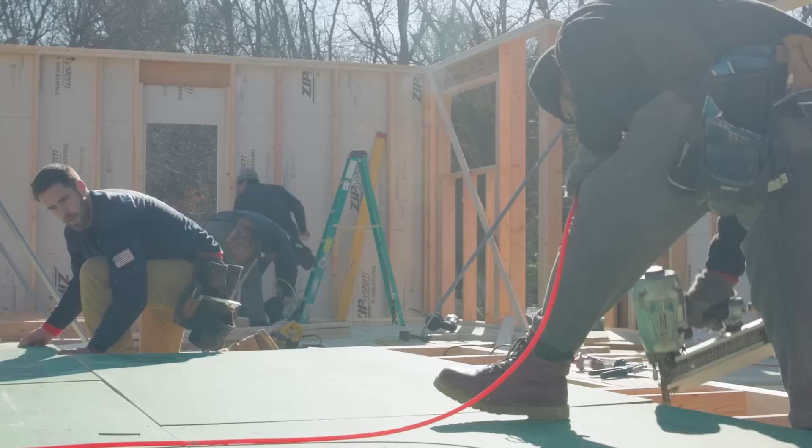Hey, Build Show Build Boston. Steve Baczek, Architect here. You guessed it, it's wall framing day. Nothing more exciting than seeing this thing come alive in 3D. No intro today, let's get after it.

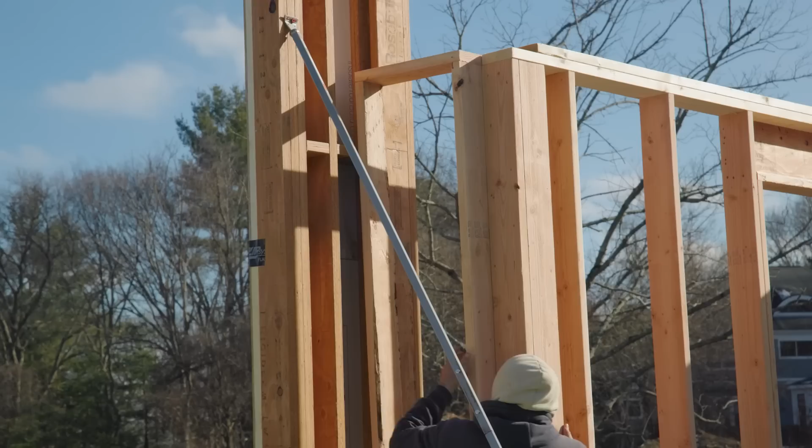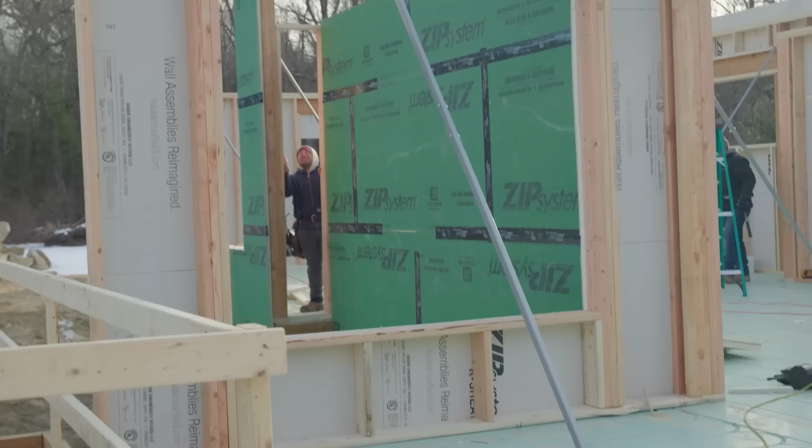So we're talking about wall framing today. There's a lot of exciting stuff going on, framing walls and standing them up around us, but it's really important before we get to the action that we understand what pieces we're using, what their names are, and some of the building science behind a wall assembly. We'll run through all of that, then get into the actual framing and putting some walls together. First, let's talk about what we're using.

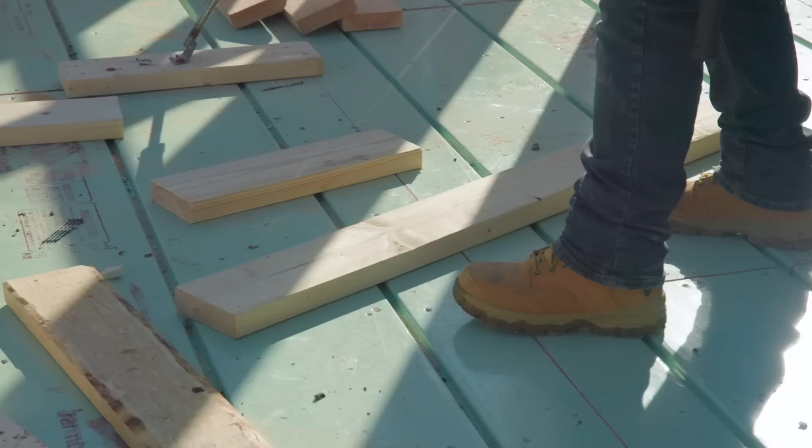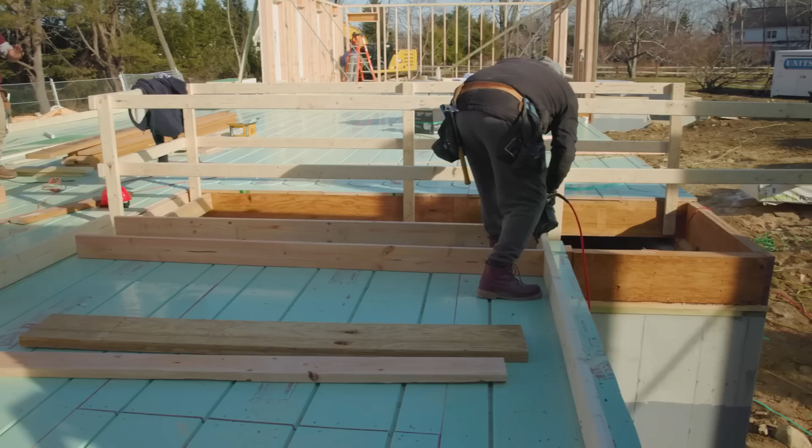With exterior walls, the common material is a 2x stud. Historically we started with 2x4s, then moved up to 2x6s in our climate zone, and it's somewhat dependent on climate zone. The insulation rating and building science rating of your wall system is tied directly to the climate zone you're putting it in. For example, in Florida, South Carolina, or Georgia, we might not have to build as insulating a wall as we would here, or say in Minnesota or Montana, for obvious reasons. So here, typically we build with 2x6.

The spacing, just like floor joists when we talked about floor framing, you have the option to do 16 or 24. 19.2 is probably an option too, but I can't say I've ever seen one framed. So basically 16 or 24 inches are your options. Here we're doing them 24 inches on center.

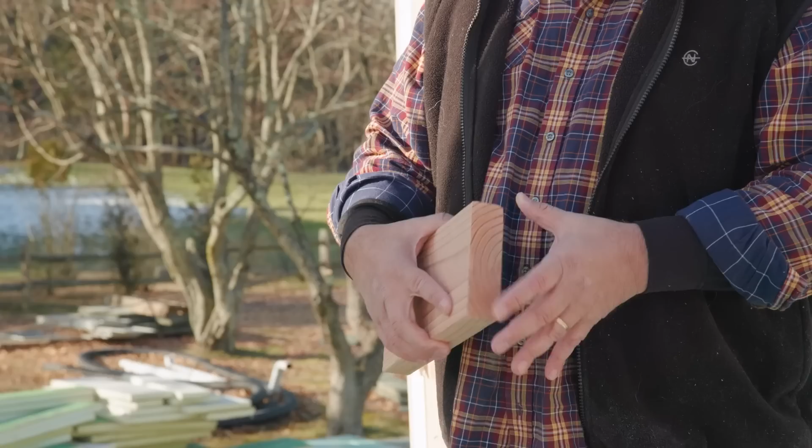We're using two different kinds of studs. The most common is just a solid stick, we call it a 2x6. The actual dimensions are 1.5 inches by 5.5 inches. The 2x6 name comes from before it gets dressed and cleaned up, it's basically the rough cut piece of wood. So 1.5 by 5.5 inches, and they come in all the standard lengths, you can get 8 footers, 10 footers, 12 footers, 14 footers.

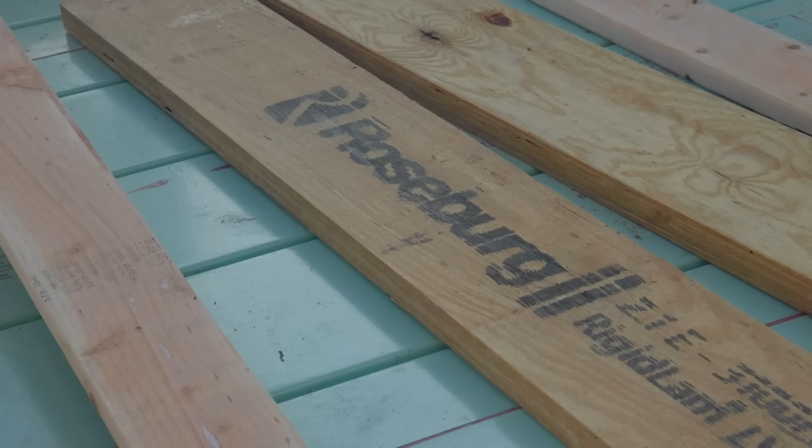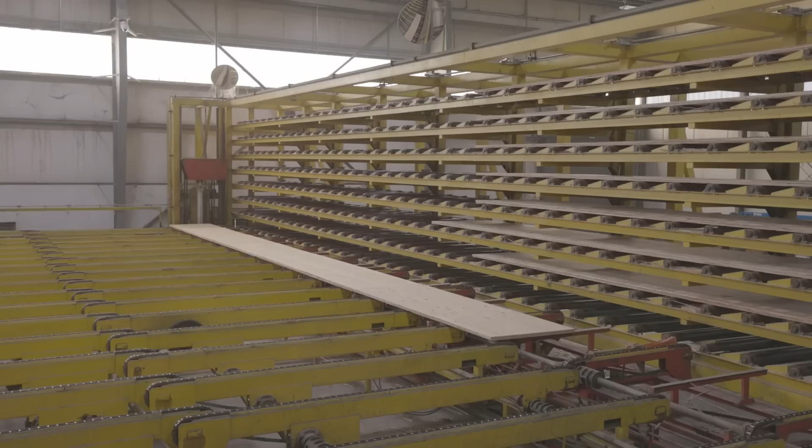But here we have a number of tall walls, so we're actually moving to an LVL stud. You can see this is made up just like plywood. When I was out at the factory, these things get made up in 4 foot wide by 66 foot lengths, it's absolutely incredible, the tour I got at the factory. After they get made up as these giant LVL slabs, they simply get cut to 5.5 inches, so they're very much the exact same dimension.

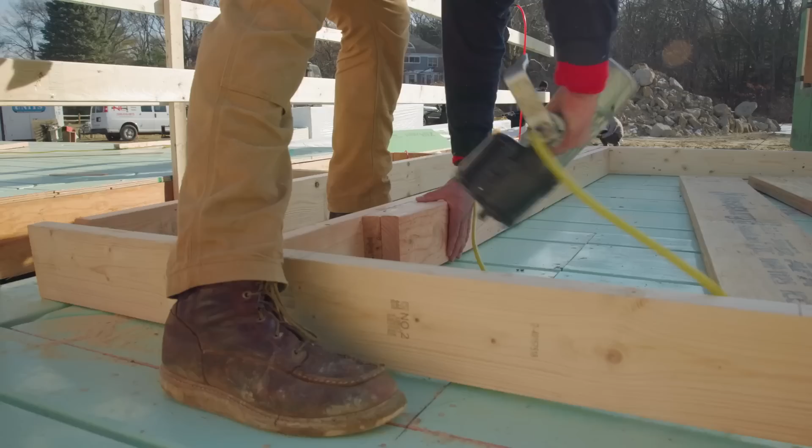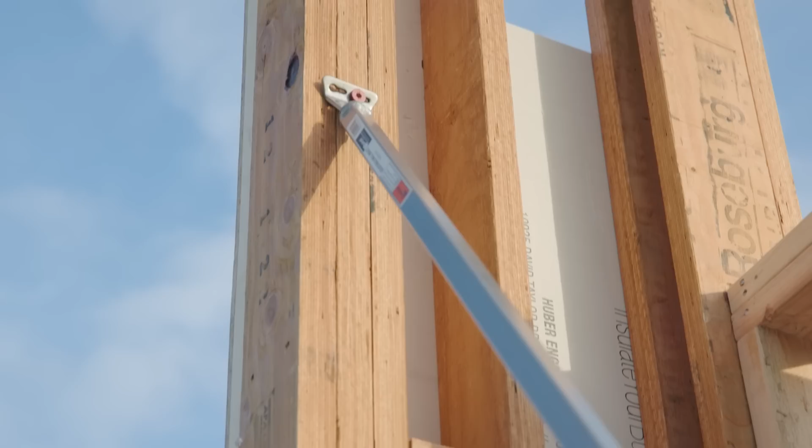The nice thing about this is you get a nice crisp edge, so the perception is that it's really clean framing as opposed to the little rounded edge on the regular stud. But the reality is these are a lot stronger and more stable. We have a number of places with tall walls where we're using these for strength, but also because when you get to walls that are 14 or 15 feet tall, you're at risk of twisting and warping. So to avoid that, we go to the engineered stud, it just makes for a stronger, more stable wall.

In other areas where we need columns, we're using LVL, or basically engineered wood columns. These are nothing more than the stud, but in 3.5 inch thickness, 5.5 inch. These take the place of steel columns, lolly columns, built up stud work. Historically we would do 3 or 4 2x6 studs ganged together, but in lieu of that we use a lot of engineered wood products. One, we know exactly what load these can take, and they're dimensionally cut so they fit right inside our wall system and are able to pick up beams along the way.

As far as the header goes, it's nothing more than a beam that goes over the window. We have our wall, and we want to cut a window in there, so we have to introduce some kind of support above the window, and that's where the LVL gets called into duty. The LVL is again just basically a sheet of plywood, it's 1 3/4 inches thick, and in this case they're 9.5 inches deep. We'll talk about those a little later.

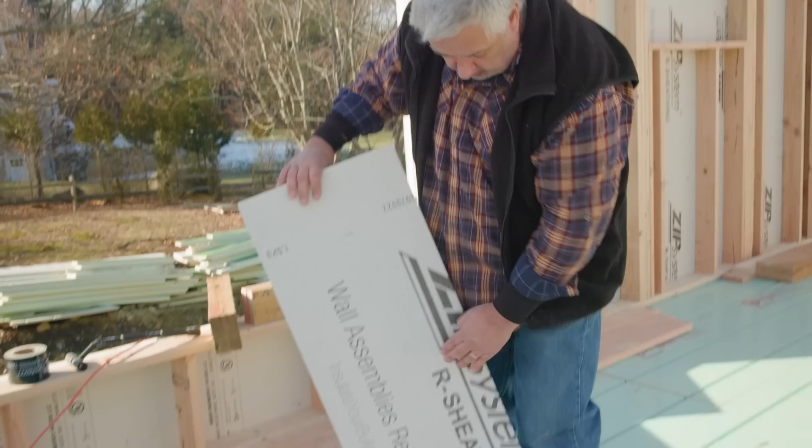In terms of the wall sheathing, we're using a Huber Engineered Woods Zip R sheathing. You can see it says Zip R system, R sheathing on the outside. What they mean by that is the standard zip is a 7/16 inch OSB, oriented strand board, made out of a series of strands intentionally laid in a specific orientation at the factory so that they can develop a strong sheathing panel in the 7/16.

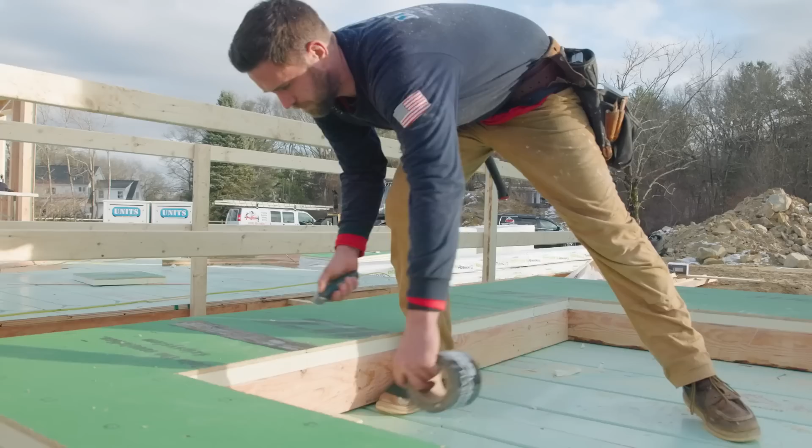You can also see on the outside it has this green stuff, the green color. As you drive around, you see a lot of green buildings going up. Zip is pretty much the go-to sheathing for most residential projects done across the country. But this one has a little bit of a twist.

Because we're climate tuning it to our climate zone 5 here, we've actually added 1.5 inches of polyisocyanurate. They make the zip, send it out, and then this piece of polyiso gets adhered to it. The 1.5 inches there provides an additional R9. So in this one sheathing, I get the weather-resistant barrier because it's integrated into the panel.

I get the structural rigidity of the shear panel, and I get the insulating value of a Zip R9, all in the same material. Now, even as a Zip R9, there is a shear resistance to this panel. If I put the panel on top of the wall framing without the insulation, the shear values are going to be a little bit higher because the nail is placed in what's called single shear, meaning the panel is directly attached to the wall framing. Because of the displacement of the 1.5 inches, it puts the nail in what's called double shear, which makes the shear path work a little less in our favor. So you get a slight reduction when you use this, but it's still strong enough to meet all of the codes. Again, this whole house has been fully engineered and reviewed by our structural engineer.

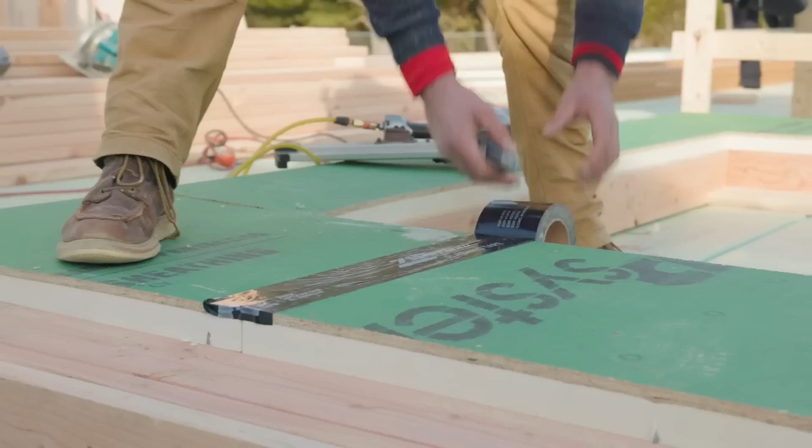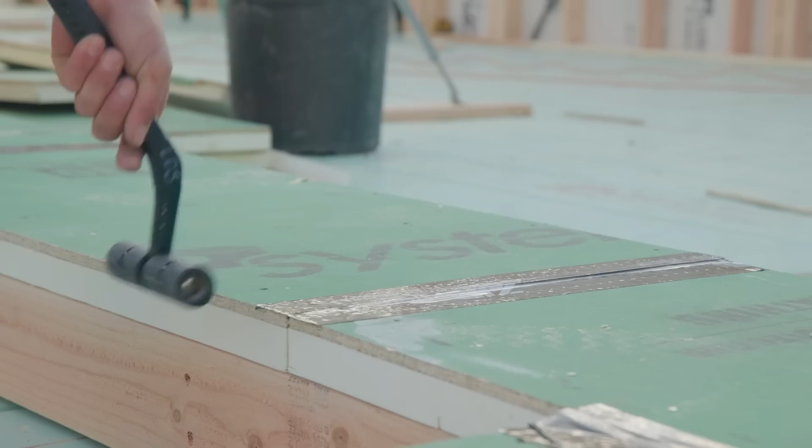They actually provide a tape that gets applied to all of the joints, their standard flashing tape. It's 3.5 inches wide. It gets placed on there, and they actually provide the Zip system roller, which has little Z's in it. As you roll it, it embosses these little Z's onto the tape, so you get a really quick quality control just by visually inspecting it.

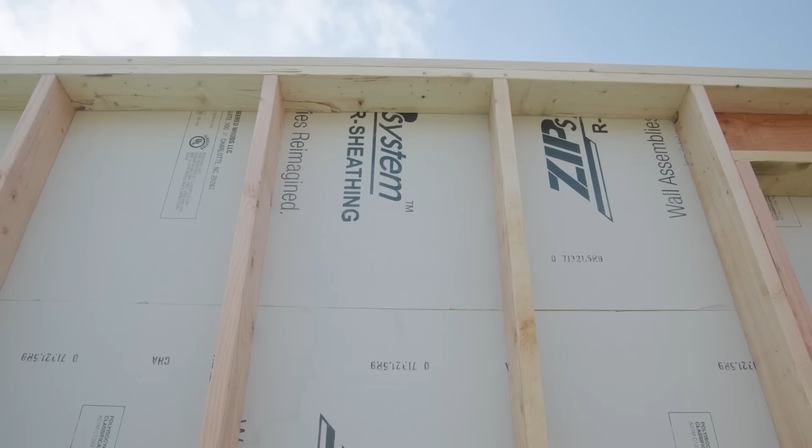So the beauty of that, as they claim, is the Zip R sheathing is not just an R sheathing, it is a system. Again, we get that weather-resistant barrier, we get the insulator, we get the shear panel, but the minute I attach that tape, we have a very effective air barrier. I know this because I've done a number of houses where we framed them, didn't cut the holes for the windows, and just tested the Zip R sheathing. We'd get numbers down in like a 0.3 ACH50, air changes per hour at 50 pascals. So it's an extremely effective air barrier if installed properly, with the tape installed and rolled and all of that good stuff.

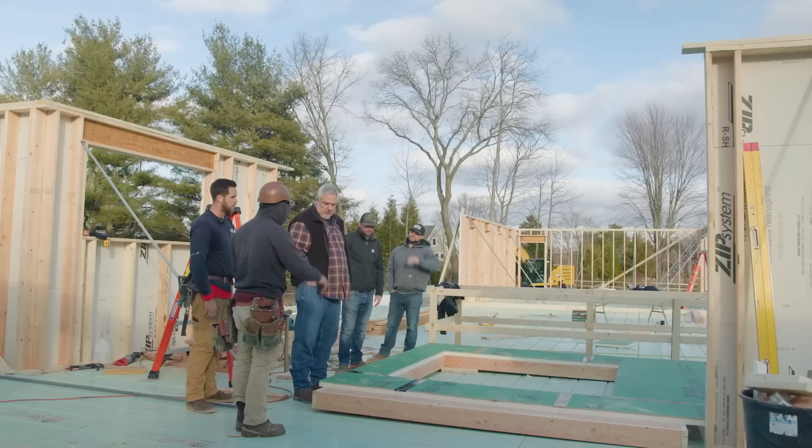So anyways, we're going to move down the wall here. Let's talk about some of the components that make up a wall frame.

We'll move down the wall here and talk about some of the names or the nomenclature in a wall framing system. We talked about it a little earlier, I mentioned the word stud. You can see we have our common studs here, which make up basically the main body of the wall where we don't have windows -- that's the main structure of the wall. Again, we have the options of framing 16 or 24 inches on center usually. Here, I chose to go 24 inches on center. It makes for a little bit more energy efficiency. Some people term it advanced framing or value engineered framing. I just call it, keep it simple, 24 inches on center framing.

So, common stud. When you have a window opening, which this represents here, this will all get cut out of the sheathing in the future. You have basically the rough sill, which you see here, basically the stud placed horizontally, so that frames the opening on the bottom. What supports the rough sill are called cripples. The cripples are nothing more than common studs that got cut to support the sill at whatever that given dimension is.

On the sides of the windows, you'll see we have our header and head plate, but we have two jacks here. The jacks basically go up and jack up the header. Some guys call them trimmers, I've seen some books call them trimmers too. They trim out the opening.

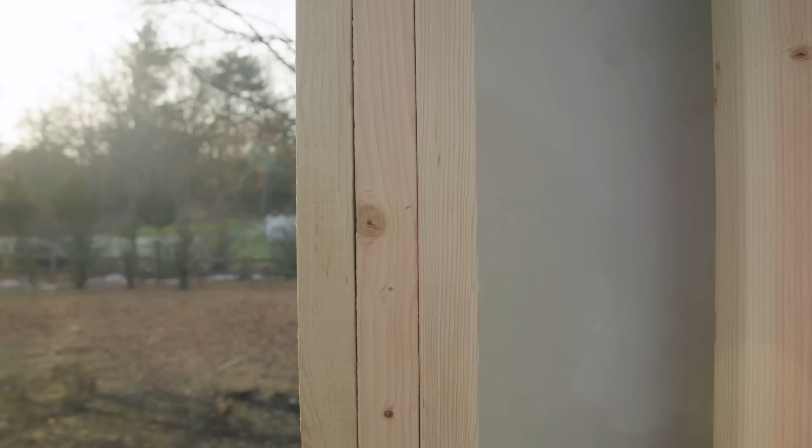Then next to the jacks, you'll see we have our king stud. The king stud is nothing more than a common stud. The difference between a common stud and a king stud is the king is adjacent to the jacks, and it's the stud that goes all the way up to the top plate and frames that rough opening for the window with the jacks inside it.

In this window here, you'll notice we have two jacks. In our drawings, I have it called out: any window openings up to and including 3 feet, we would just have a single jack. Any opening that exceeds 3 feet has to move to double jacks, and if it's a very large opening, we'll have specific instructions there, directly from our structural engineer. So up to 3 feet, single jack; in excess of 3 feet, we do a double jack.

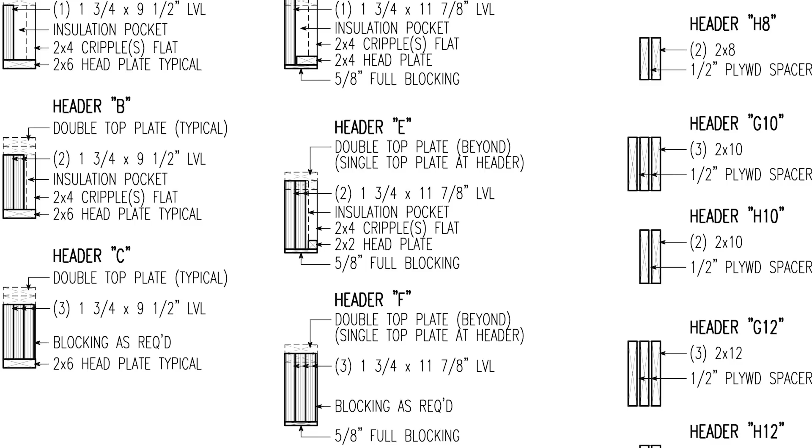So the double jack goes up to a header. In our drawings, we have a header schedule. The header can change sometimes, and it doesn't necessarily change in dimension. I like to keep a very consistent dimension. Here we use 9.5 inch LVLs, but what changes is whether it's 1 3/4 inches, 3.5, or 5.25 - meaning is it a single ply, a double ply, or a triple ply. You can see here most of our windows are framed as single ply, so they have just one header up there.

And basically the top, you'll see we have a double top plate there. The reason for 2 plates is that as you run these walls down the length, the top plate of the double plate has the ability to lap the lower plates so that we get to build this wall not necessarily as one wall, but we get to tie that in for rigidity purposes. So we have that top plate.

Then I take the header, the 9.5 inch header, and it's called to push directly underneath the top plate. And then we finish it off with what I call a head plate, which is nothing more than a twin to the rough sill that goes up there. And then the double jacks support that whole system.

Now, there's a lot of ways to do it. You might have seen some guys, and I have done it in my past years, where we'll take the header, we'll put rigid insulation in between 2 2x10s or in between 2 LVLs. But as I've gone through an experience and some iterations in thinking about it, now I just do what I call an insulation pocket.

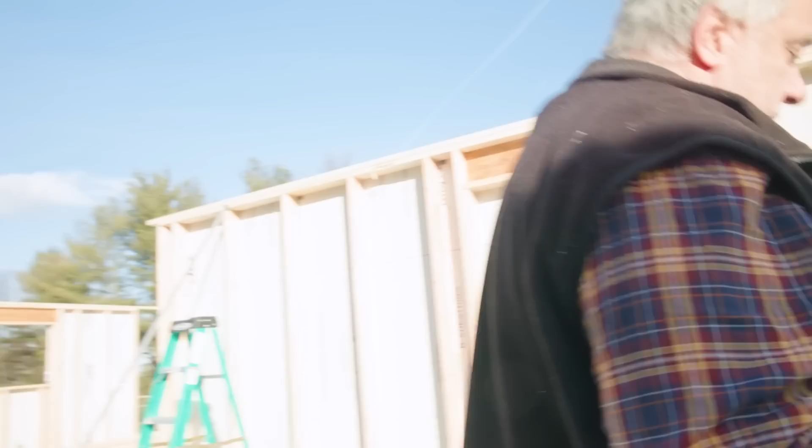Over here now we have a much larger window. As you can see, this one measures something like 9.5 feet by almost 10 feet in width. So stay tuned, when we install that it should make for some good video.

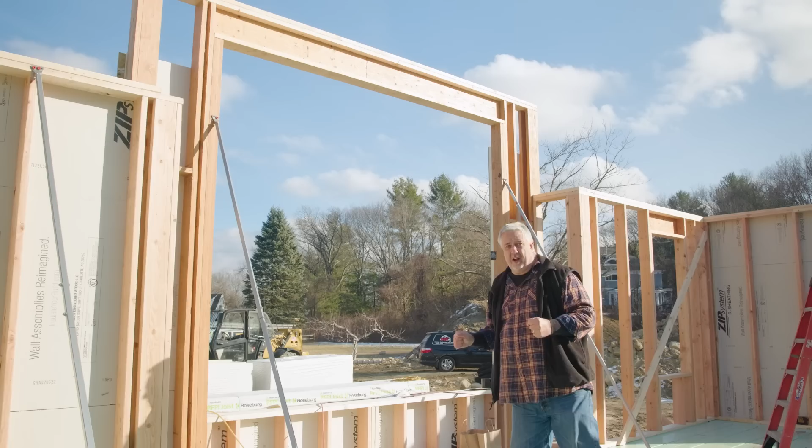But here you can see we used LVL studs. This is a wall probably on the order of about 13 feet tall, and when you get into those heights, you can see we've taken about 80% of the wall and made it a window. So there's not a lot of rigidity, we only have small spaces. The key here is by moving to LVL studs and getting that additional strength, we're able to stiffen the wall in the small areas we do have it. Plus we don't have any twisting, warping, or movement in those studs because they're engineered studs, a very, very stable material.

So just because this is a larger opening than the one we just talked about, all of the rules still apply. We have cripples, a rough sill, double jacks under the header, and our pocket header here. Because of the size here, that pocket is a little shallower because that's a 2-ply beam up there, so we have a 3.5 inch by 9.5 inch header that goes out to the double jacks. Just because it's a larger opening we change a little bit of the rules, but pretty much the framing stays the same. It's really important that we maintain some level of consistency so we're not asking the framer to do this over here and then switch to this system and then switch to that system. Everything's the same dimension.

All right, hey Matt. Hey, how you doing buddy? Good, how you doing? Good to see you. Everybody, this is Matt King, Matt King's in charge of Matt King Construction, he's the framing contractor out here.

So Matt, we've just been talking a lot about the framing, I figured we'd catch up with you and maybe talk a little bit about your process here. So if you want to, just give us the lowdown, you got the floor framing down, where do you go from there?

Yeah, so we start by squaring up the rim board, and we get all of our lines snapped around the perimeter. And then, you know, we start with through walls. We do try to do one side of the house, opposite sides, that way when we have them down you can build them at the same time, and then you stand them, and then you build the ones on the inside.

And by through walls, you mean walls that go all the way to the end of the floor, correct? Yep. Are you the guy doing the layout here? So it's either myself or there's probably 2 or 3 other guys that can read the plans and are trusted enough to interpret it. There's a little bit of logistics, a little bit of puzzle, a little bit of wisdom and experience in pulling from this side, laying it out. So you're looking at guys that have done this quite often, and then you do the layout.

I've seen framers work, and you always lay out two plates at the same time. You basically do them in twins so that the bottom plate and the top plate acknowledge the same markings.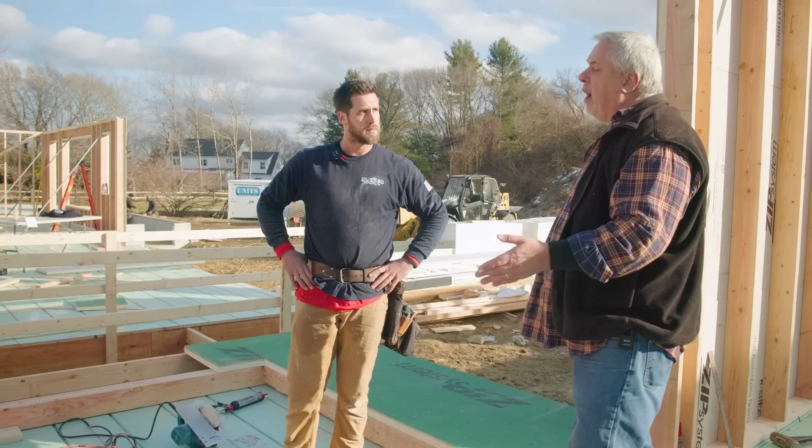Then you get into laying out, and we talked earlier about the components of the wall framing, the jacks and trimmers. So you have your system where you put jacks and kings and cripples, and once you have the rough opening established, you have the heights of the jacks and the cripples, and guys are just sitting there cutting all these pieces.

Typically we'll try and write the dimensions of the components for the window. The guy laying out will write it on the plate, so if he's over there with the plan, the guy building the wall can say, okay, these are my jacks, this is the header I'm going to use, this is the rough opening of the window, and from there they can usually take it. So there's a lot of teamwork - someone figures it out, but they're dropping that information for other people to grab onto.

One thing I've always acknowledged about framing crews, and that I'm always impressed with, is you go out to a framing job and you never see somebody standing around. That's like a rule breaker. We say asses and elbows. There's always something to do on a framing job - if at the very least, clean up the mess, roll up an extension cord, do something. But there's always something to do.

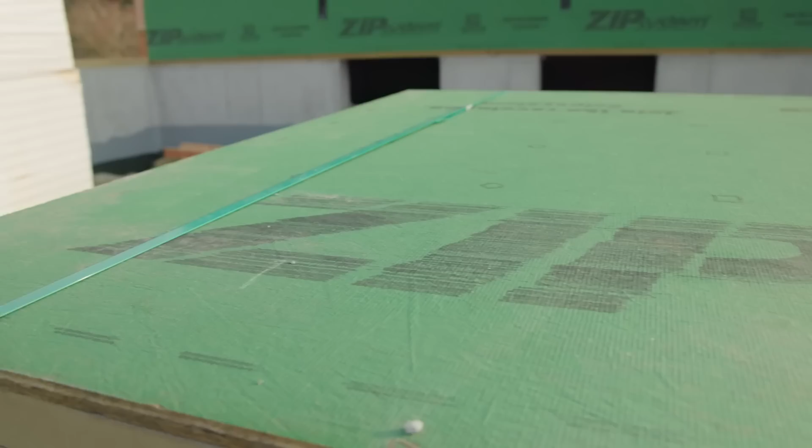So the materials we're using here - obviously I've done a number of projects with you, so there's nothing of a mystery here to you. We're using the zip R sheathing. I'm assuming you're starting to see that a lot more. Yeah, especially in commercial - usually commercial specs it out, but some houses are lucky enough to get it as well, so this happens to be one of them. That probably takes a little different coordination effort as far as managing the corners, managing length of walls, because you've added that 2-inch thickness to the wall. So there's just slightly different math that you're applying, right?

All right, well I don't want to stop you, man. Thanks for taking the time to have a chat with us. Everything looks great, buddy. Thank you. Sounds good, no problem, all right.

So we're over in one corner of the house. One of the last things I want to talk about is the building science of a wall assembly. We talked earlier about things being climate tuned to certain climate zones, and as I stated, we're in climate zone 5 here, which is considered a cold climate, or a heating dominated climate. We have nice warm summers, but we're predominantly a cold climate where we do more heating than cooling, as opposed to say Arizona, Phoenix, or Miami, Florida, which is a cooling dominated climate.

So in a heating dominated climate, when I look at wall assemblies, I like to think of the three parts of a wall assembly - sometimes they're not components, they're the absence of components. The first part is the cavity, which makes up what happens in between the studs. The second part is what I call the opaque part of the wall, or opaque framing, which is basically all of the areas that the framing members make up. And then lastly is the window opening. Here we have a corner window unit - this one just isn't cut out yet, but we have that one, and then this large one here that makes up the corner. But those are basically the three components of a wall assembly.

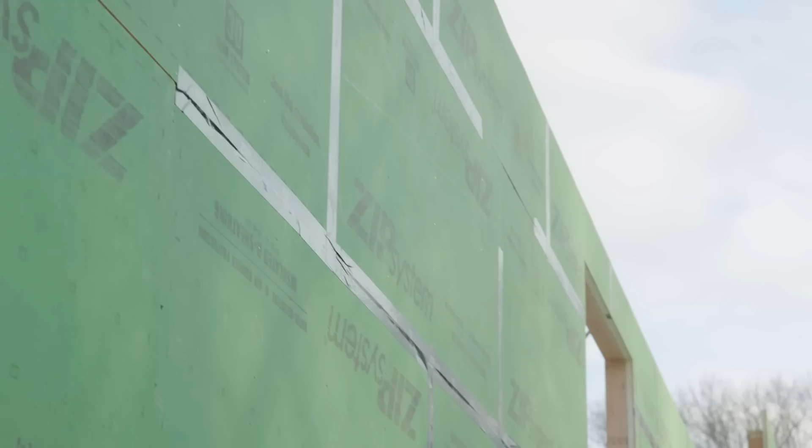And let's say 3.5 components, because the other part is what happens on the outside of the wall. In this case we have the zip system R sheathing, Zip R9 board - you can see it's got that laminated 1.5 inches of polyisocyanurate right there that gives us an additional R9. So if I take all of these exterior walls and put them together to create one wall assembly with all three of these components, and then look at those components individually, I'd come to understand that the cavity probably makes up something like 60 to 65% of the wall system.

The opaque nature of the wall, or all of the framing cumulatively, probably makes up somewhere around 16 to 18%, maybe 20% of that wall system. And then the windows probably make up an additional 20% of the wall. So I have those three components.

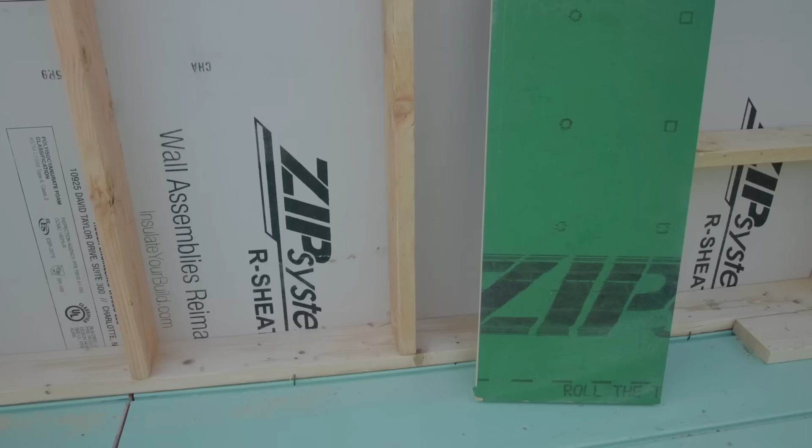Each one of those three components has an R value, or when you're dealing with measuring the resistance, you actually deal with the U value, which is the reciprocal of the R value. But here, we'll talk in terms of the more common R value.

So the cavity, 5.5 inches, we're probably looking at putting in an insulation in the R21 to R25 range, depending on what you put in there. Remember, that's 60% of the wall. The stud, a 2x6, carries about 5.8 - let's just call it R6 for easy math.

And the windows here, we're using a high performance window - we're going to be up in the R6, R7 range with triple glazing. So you can see that basically the window and the framing carry roughly the same R value, but those two pieces, which make up just under 40% of the wall, are carrying about a third of what the cavity covers.

So by going to 24-inch on center, that takes our opaque framing number from the standard 16-18% down to maybe a 12-14% range. That shift of 5-6 percentage points goes to the cavity. That's how we get that energy efficiency bump - the R value in the cavity gets bumped by going to 24-inch on center, an additional 6%.

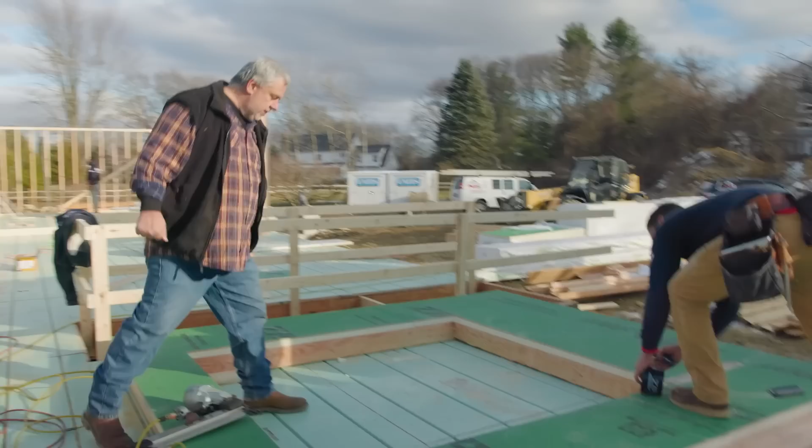Hey, look, we caught Matt here, and we got some taping going on. Hey Matt - caught you at the perfect time. Yep, so we got the wall framed, we got the sheathing on here.

Now, we're very fortunate on this job that Huber Engineered Woods chose to partner with us, so they provided all of the Zip R9 for the project, which is a really good deal for Scott and Jonathan here. But I can see that we're completing the system here.

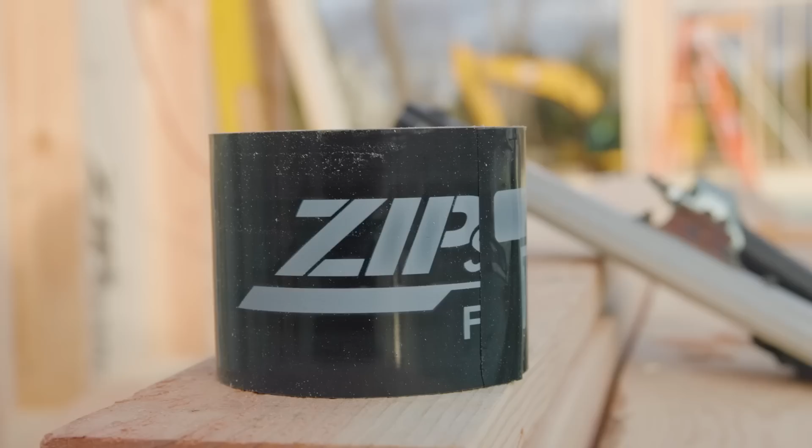So let's talk a little bit about the tape - standard 3.75-inch flashing tape. It's a cold weather tape, so it can be applied in colder temperatures. I don't exactly know which one it is, but it goes down pretty darn low.

Is there any method to your madness here? It's really pretty simple - the first thing you want to do is make sure that the tape always overlaps as you go up. So you always start on the bottom and work your way to the top. That way, if there's any water flowing down through our rain screen system, it's always operating over a shingle-fashion tape installation.

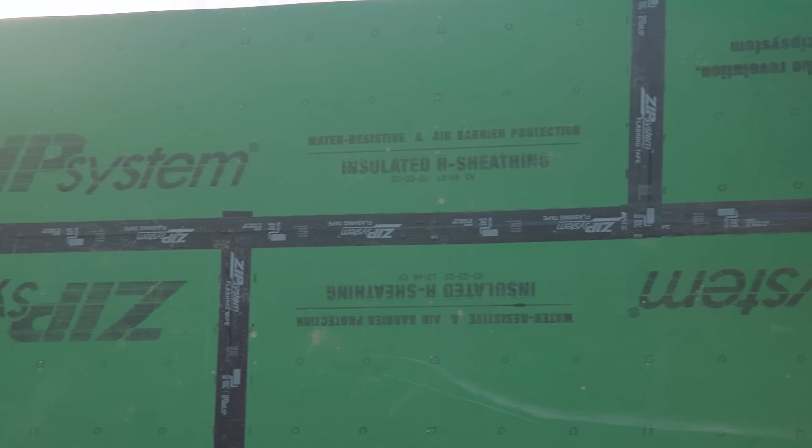So you just think like a water droplet. There you have it, folks. So you apply the tape. Is there anything we have to do to the tape? You just try and keep it as straight as possible. In this situation, we don't have any overlap, so we can just go ahead and get it going. But you just get a few on, get the roller, roll it out real good, and make sure it's on there nice.

And the cool thing about that roller is it has the Z's embossed in the tape, so that as you roll it, as far as quality control, you don't have to go and tug at it or do anything. Just a real quick visual inspection and you know somebody rolled it. And then we get a nice adhered tape.

It's interesting - the very first time I used Zip was probably around 2009, 2010. I took two pieces, taped them together, and they're out on my wood pile at my house because I just wanted to see how it lasts. It's like it was taped yesterday. Yeah, it's an incredible system.

I know a lot of people are leery of using tapes and adhesives in their project, but Zip's got this system down. The tape itself is a great product. I would suspect that after you roll it, if we tried to tear that up tomorrow, we'd probably take the facing off of the OSB before the tape comes off. You can't get it up. Once it's on there and it's got a little bit of heat on it, it's not coming up for anything.

All right, well again, thank you very much. It was great catching up with you, talking about the Zip system here, and let's get some more walls up. Sounds good.

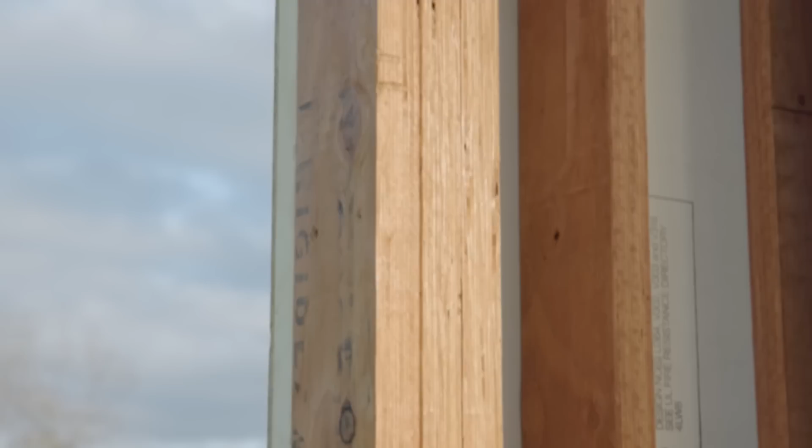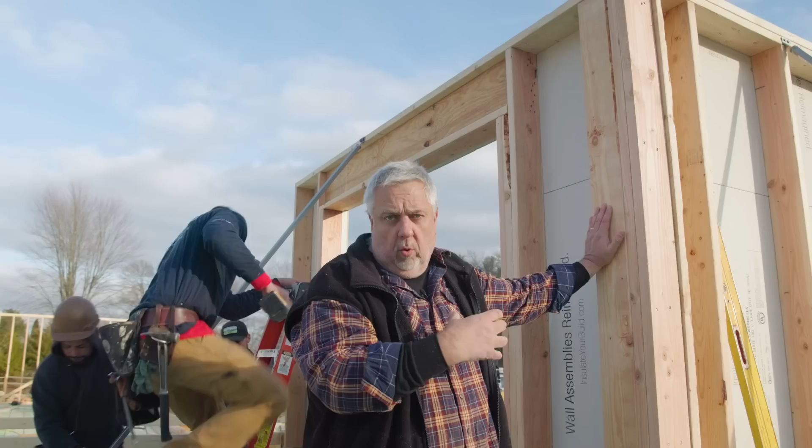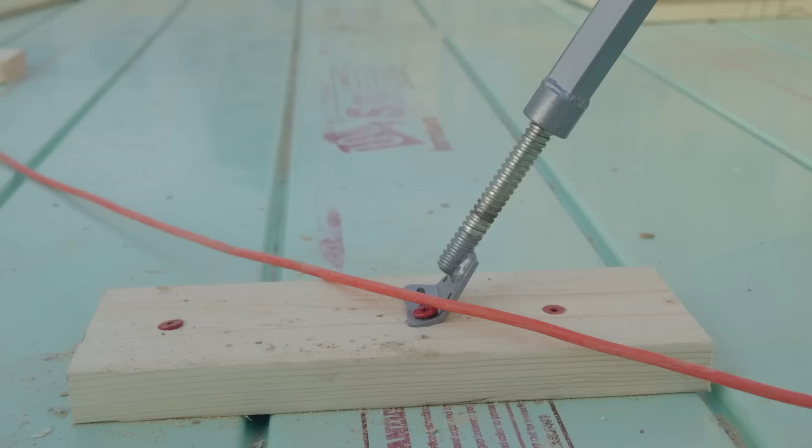So you can see Matt's putting on one of the metal braces, so it actually acts as kind of a temporary brace at the moment, holding the wall in place. But the beauty of these braces is, you can see down at the bottom here, they're going to attach it to a 2x that they nail in. Notice at the bottom of the brace that it actually has a screw jack component to it. So they'll put the screws in there now. It'll temporarily hold the wall in place.

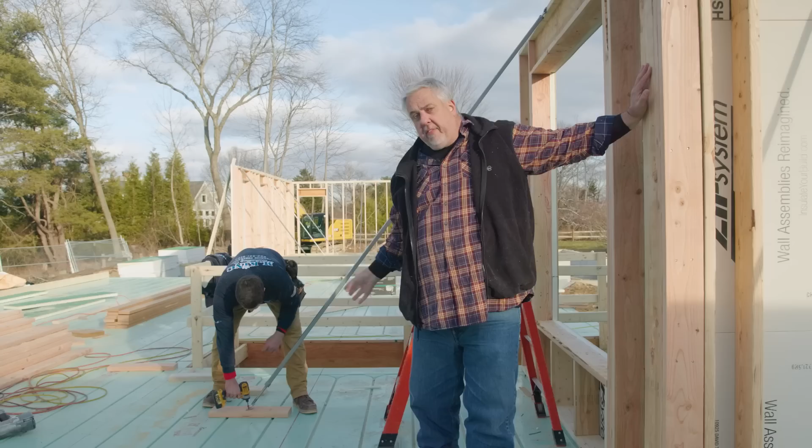But the beauty of that is, after they're done with all of the walls, they'll come in, they'll run a bunch of string lines, they'll double check everything, but by simply rotating those braces, they can push this wall in or out and get everything perfectly square and tight and plumb all in one exercise, and get it all set up so we'll be ready for the roof frame.

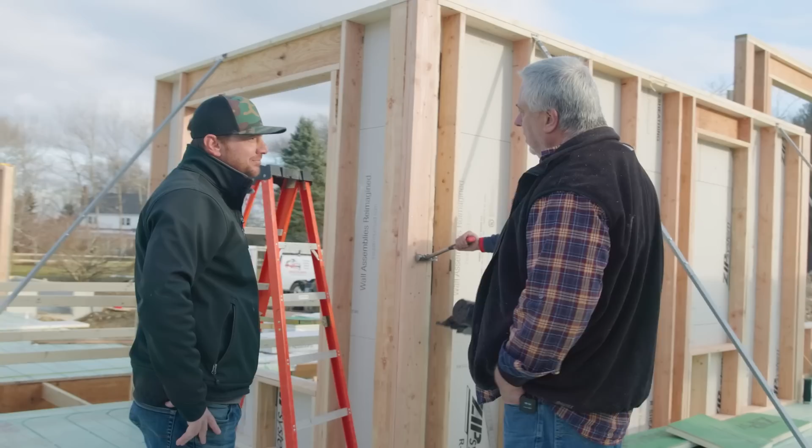All right, Jared and Matt. So, wall framing - things are well in hand here. Things are looking really good. We've got a few more walls. We still have that one big monster, that's going to be a treat to see that one go up. But I think that's a wrap for today at least. That's it, working our way through it.

Before you know it, we'll have roof on, walls will be complete. This thing's moving along nicely. And it'll be sad - I get so excited when framing is here and then it's gone. So anyways, buddy, I'll catch up with you. All right man, you have a great day. Thank you.

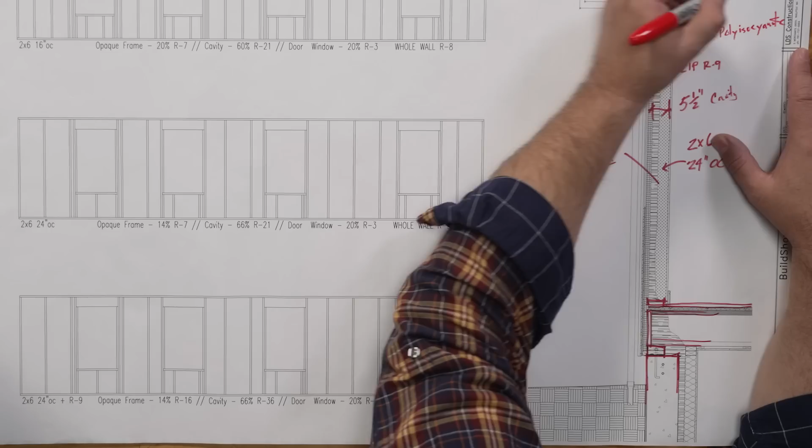We're also using Zip R9 on the outside of the wall. Zip R9 is basically 1.5 inches of polyiso - polyisocyanurate, rigid insulation - laminated to 7/16 OSB, which is their standard zip. Together, those make 1 15/16 inches of insulating sheathing on the outside of the wall.

Inside that 2x6, 5.5 inch cavity, we will be insulating with 2 inches of natural polymers, which is a closed cell spray foam. Some people call this a flash. Then we are going to do blown-in insulation in the remaining 3.5 inch cavity.

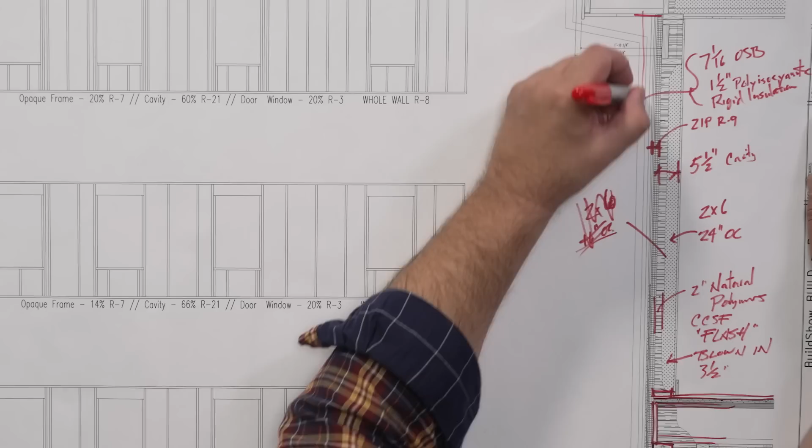The wall height we're using here is 9 foot 1 inch. All of our head heights, when we were out there, we talked about that. Our head heights come in at 7 foot 11. Too many numbers. The way we do that is we have our double top plate on the top.

Then we basically have a 9.5 inch header height. I say header height because we have a header schedule - sometimes that's 1 ply, sometimes it's 2 ply, and actually sometimes it's 3 ply, because we can fill that right up. In most cases, the windows, it's a single ply, so it only comes in at 1 3/4.

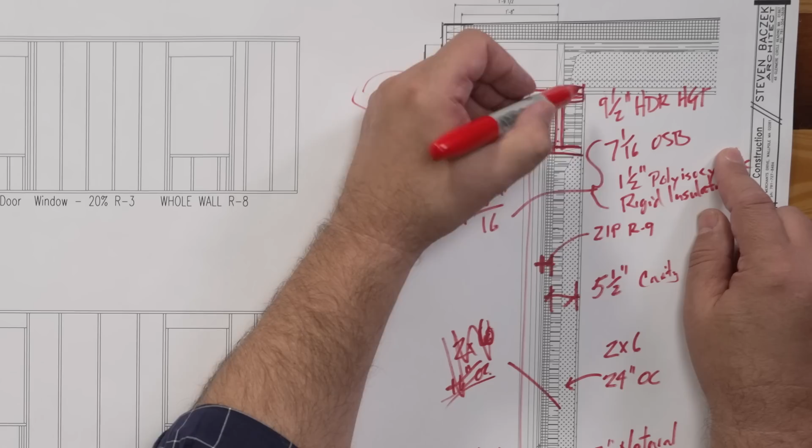That leaves us some remaining cavity that we will spray the natural polymers in. I like to call that detail a pocket header - you saw it when we were walking around out there. The pocket header basically enhances the thermal control layer where all the headers are.

Traditionally you would do this built-up header where they'd do 3 2x10s or 3 2x12s with 1/2 inch plywood, and you'd be at roughly R7-ish. By doing the pocket header, we're probably somewhere around R28-ish would be my guess. So far better situation to be using that pocket header.

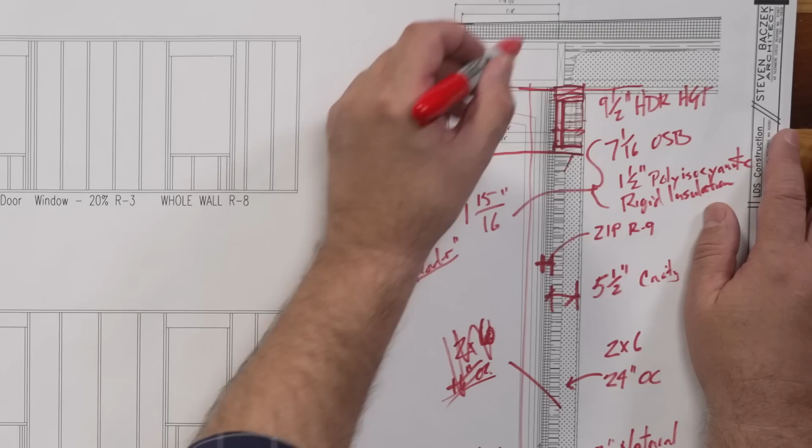Our roof framing happens above that, and we'll be talking about that in the next episode. So that's our basic layout on the wall framing. But what I wanted to get into is the R value when we talk about our wall systems, and this is where the industry is a little misleading.

If we have 3.5 inches of blown-in, let's use 4 inches for an easy number - that's roughly R15 for the blown-in. We have 2 inches of natural polymers at R13, and then R9 on the outside. So we're talking roughly R37... yeah, R36. Let's just say it's R36.

I could very easily go around and boast, hey, we're building this exceptional wall system, it's an R36 wall system. But I would be misleading you. The R36 is the center of cavity R value - we'll call it COC, center of cavity.

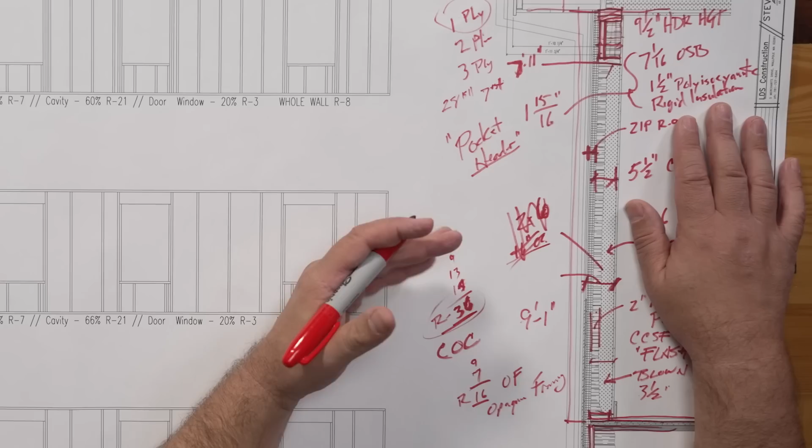R16, and what I call that is the OF, or opaque framing. So you can see we go from 36 down to 16 - that's a pretty significant drop. The question is, what are the percentages that we're looking at here in the wall framing? Clearly we're not building an R36 wall if a good percentage of the wall is only R16. That number is going to come down.

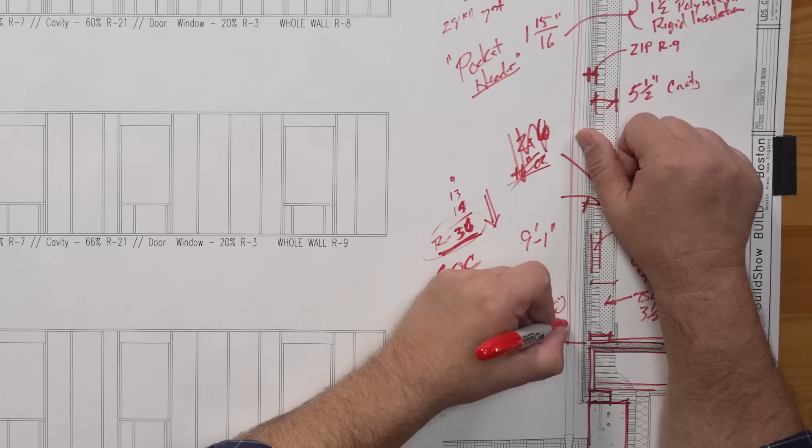So let's add in the third component. We have a series of windows and doors here. If we did a standard domestic product and met code, we'd be at something like R3. We're using an enhanced European tilt turn window system here, so we're going to bump that up to roughly around R7. But the R7 from the 36 is about 20% of our stated R value. So if I go around and say, hey, I'm building an R36 wall, well, no, you're not.

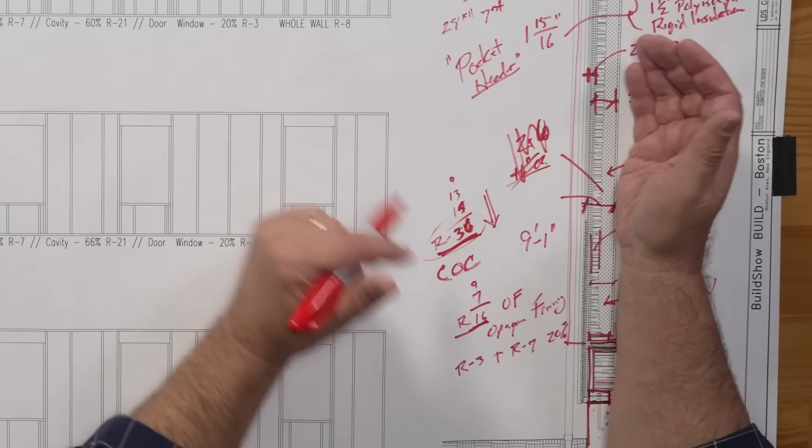I'm building an R36 wall for a large percentage of the wall. A certain percentage of the wall, I'm only building R16. And all those little holes that I cut in the wall - in this case we have some very large holes because we have some very large windows that Schuco USA is building us some beauties. I can't wait to shoot that video and go to the factory and see these things get built. But where we have those very large windows, at best we're at R7. So we're not nearly anywhere near the R36.

So I took a wall out of the house and did a wall framing elevation. I threw some percentages against it, I threw some numbers against it. Now some of you might use slightly different numbers - that's okay, this is historical data. I actually went back and looked.

For years at Building Science Corporation, I worked with framing crews getting them to move to 24 inches on center - actually going out to houses, counting studs, doing wall framing elevations for whole houses, then doing them 24 inch on center, 16 inch on center, comparing those numbers, getting those percentages and getting a very clear understanding. So my numbers might be slightly different than yours, but my numbers aren't lying. These are very valid historical precedents.

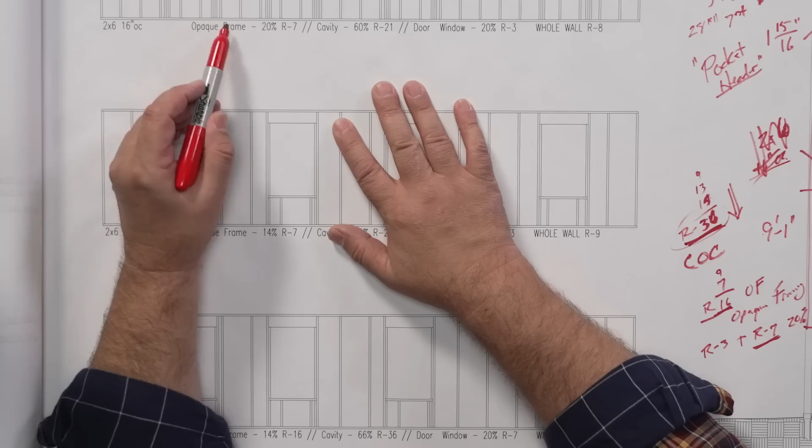So let's just take a look at them. The first wall that we're going to talk about is a 2x6 wall, standard framed, 2x6, 16-inch on center. This one just has regular zip, or it could be plywood sheathing, but it has no insulating sheathing attached to it - it's just the structural sheathing. If I look at this, my opaque frame accounts for 20% of the wall at R7. So 1/5 of the wall is at R7.

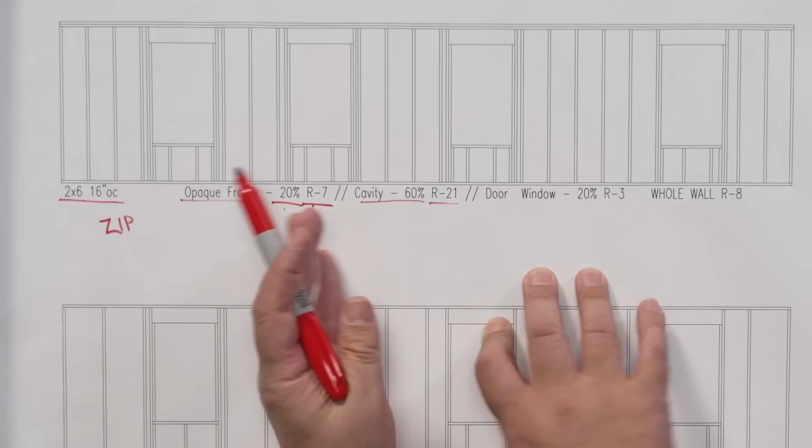The cavity is roughly 60%, and that's at R21 - that's basically a code number. Then the doors and windows account for roughly 20% of the overall walls. Now understand, these percentages are taking all of the walls of this house, cumulatively adding them up, and then saying: if we did a chart where we graphed all of the walls, 20% of it here would be opaque framing, 20% of it would be doors and windows, and 60% of it would be cavity.

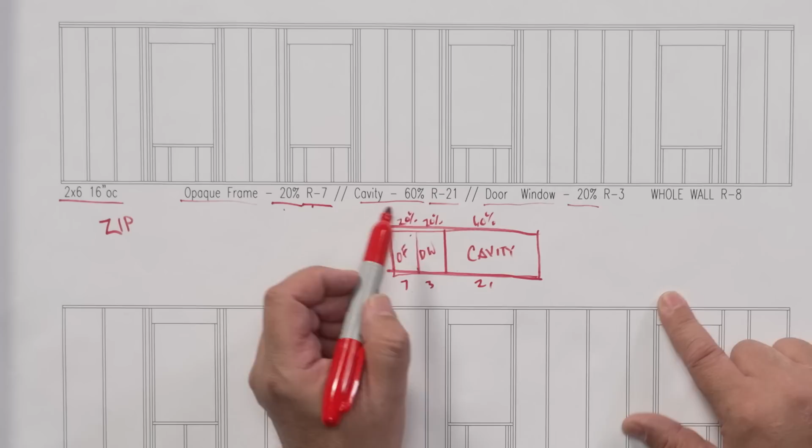So it would be distributed along those lines. Understand that in this case, this is 7, this is 3, and this is 21. Well, guess what happens when I take those percentages - 20, 20, and 60 - and take those percentages and these R values, and average them respective of their percentages in the wall system, I get what's called a whole wall R value of R8.

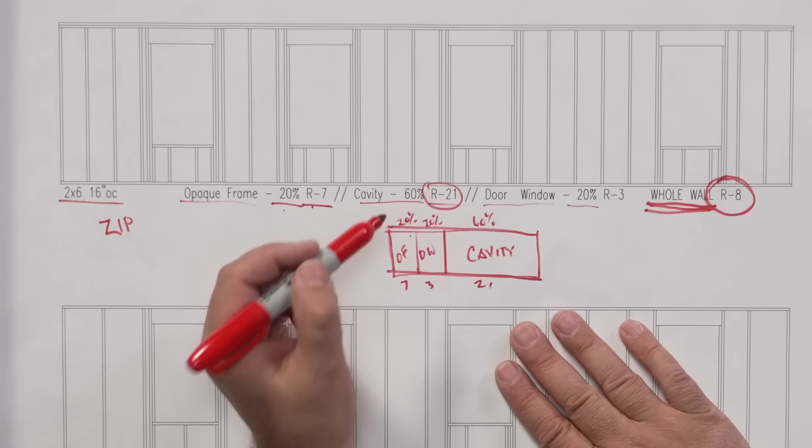So builders, insulators, everybody - if you talk to them and ask, hey, what kind of wall are you building? Oh, we're building an R21 wall. Yeah, you are - center of cavity, for 60% of the wall. If you really want to talk about what you're doing, you're building an R8 wall assembly. And the wall assembly is the whole wall R value, right? That's taking all the components of the wall systems, all of their R values, and averaging them to get that number.

Now here's a little glitch, because I know some of you out there are going to take these numbers, go do the math, and come back and say, hey Steve, my numbers don't match up to yours - I've written articles on this, I've done other videos, and I get those comments all the time. Understand that when you do these, you have to switch all these R values to U values, do the calculations, get the answer in U value, and then invert it to the R value to come up with the R8. You can't do the math as R values, especially when we get into insulating sheathing, because the temperature and the work of the insulation changes as you migrate through the insulations. If I have a wall that has insulating sheathing versus a wall that doesn't, the outside of the cavity insulation is far colder without the insulating sheathing.

So you can't do it by R value, you have to do it by U value. So let's press on, I have another wall here.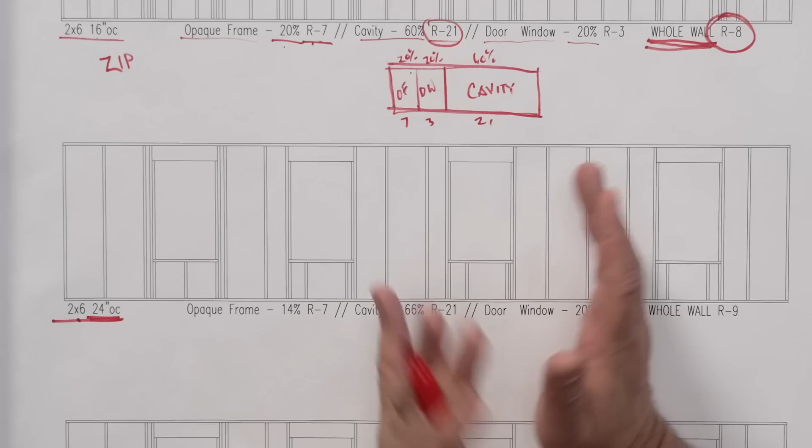This is simply moving the studs out from 16-inch on center to 24-inch on center framing, staying with the 2x6, staying with standard board sheathing, either zip, plywood, whatever structural panel you want to use, but it's a non-insulating panel. Let's see how the numbers differ. Some people would call this advanced framing. I've heard people call it OVE, optimum value engineered framing. There's a lot of names. Me, I call it 2x6 24-inch on center framing, because that's what we're doing.

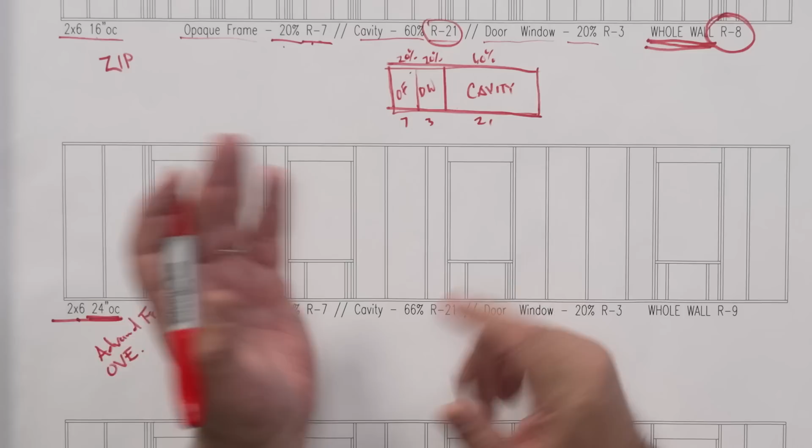So if we look at these numbers, the opaque frame goes down to 14% from 20%. So we gain 6%. Where does that 6% go? Yes, it gets added to the 60% of the cavity and moves that up to 66. R21, we keep the window and doors. So if I do my overall whole wall graph and say 20% here, that would be for the doors and windows, right? And then the opaque frame would just go down to 14%, and this would be 66% for the cavity. All right, and that's 21, this is 7, and that is 3.

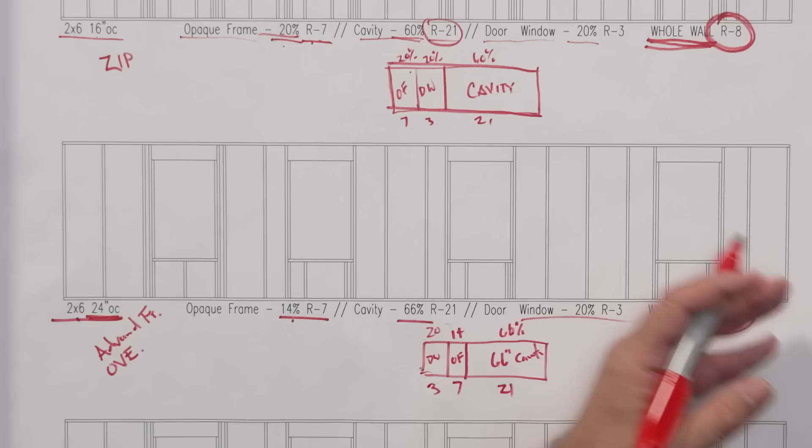But if we look at those numbers, you'll see that yeah, it goes up, but it went from R8 simply to R9. So you might hear a lot of people say, oh my God, I do advanced framing because it enhances the insulation package. It does, they're not lying. But it isn't the end-all, save-all to a good house being built. Because you can see here, it moved the R value basically 1 point from 8 to 9 by going to 24 inches on center. It didn't double the number. It increased it by what, maybe 10 or about 12%, right? So it's not a whole lot, but it is an improvement. So I'm not saying don't do it. What I'm saying is don't sit there and believe that because I'm doing advanced framing or OVE framing that I'm rewriting the book on energy efficiency, because you're not.

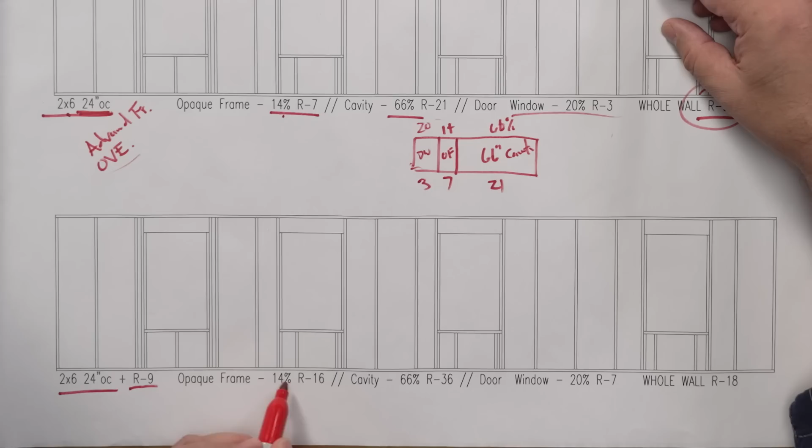All right, now let's take a look at what we're doing out here at Build Show Build Boston, and you'll understand why we made some of the decisions that we made out there. If we look at it, we're doing 2x6 24-inch on center, but we're adding an R9 insulating panel. You can see it on the outside there. So what does that do? I'm just going to put this math across here. It elevates our framing to R16.

Our number there was R7. Our number there was R7. We're almost double here. Why are we double? Because everywhere we have a stud, we have zip R9 on the outside. So we effectively doubled the insulating R value of our opaque frame. And by going to the 24-inch on center, we took our 20%, dropped it to 14. So I've optimized both sides of that number, right? I have 14% of the wall system at R16 now, not R7.

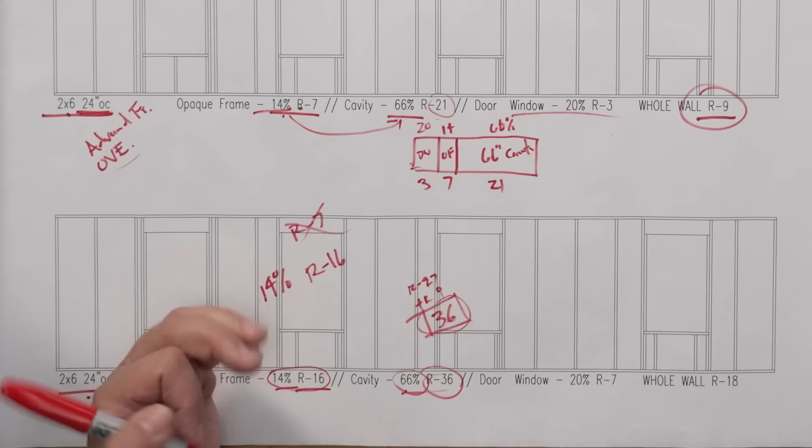Moving on to the cavity, 66%, that's that 66%, that 6% shift here because we went to the 24-inch on center. And you can see here, because we have that cavity R value, in this case, what did I say? We're at 36. That R9 also gets added to the cavity insulation, right? And we had the cavity insulation at roughly R27. So it's that R27 plus the R9, and that gets us to the R36, right? R36 is significantly higher than the 21 there. And we've optimized both the percentage and the R value once again. So in both of those, they've increased.

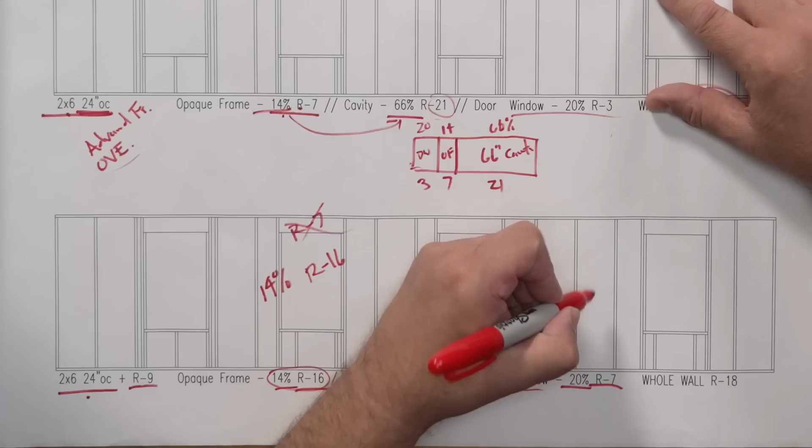Door and window, the 20% doesn't change because unless we take windows out and add walls, that number isn't going to change. But we moved to a triple glazed European style tilt, turn, and fixed window assembly, meaning some of them are tilt turn, some are tilt only. We have a lift and slide door, and a bunch of the windows are fixed. And these are all being made by Schuco USA. So they're a fine aluminum frame, thermally broken, triple glazed window, but they are coming in at roughly R7 for the same 20%.

But when I look up here at the standard code-dictated, most widely used domestic product, we're at R3. So I've more than doubled that number. You can see in all three instances I've made a significant impact. And the whole wall R-value here is that number times two, so we're getting an R18 wall system.

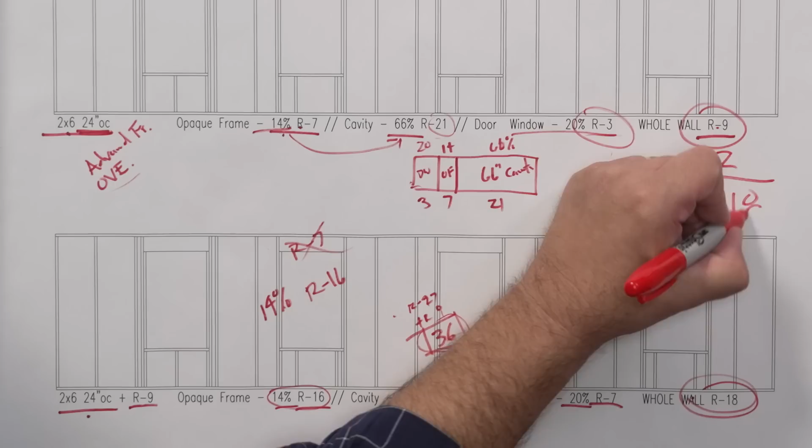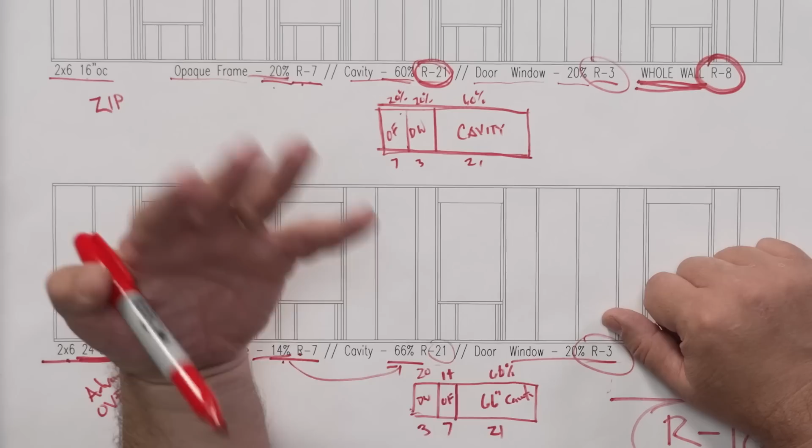Now, I'd like to sit there and say wow, we're doing something great, which we are. But understand, up here at this code-built wall, builders are saying, oh yeah, this house has R21, we're building R21 walls. You're not. You're building the R8 walls.

After moving to 24 inches on center, adding Zip R9 and upgrading the windows, we still haven't accomplished their misleading number. We're getting closer, but we haven't accomplished it.

We would have to do some other things. We could go to a thicker insulating sheathing. I have some houses where we do a 2x8 wall with staggered stud framing, or if you want the Ferrari of walls, we can move to a 12-inch double wall system and really enhance those numbers. But understand, this is the spectrum of capabilities of a 2x6 wall.

But you can see that just by making some choices, moving to a product like the Zip R9, moving to a triple glazed window by Schuco USA, we're moving in the right direction, as well as putting in closed cell instead of just blowing it in, doing that flash and bat. For that first 2 inches, we're at R13, not R8. So there's an enhanced value there of getting us up to that 36.

But look at this number. This is pretty interesting, look at this relationship. If I walked around and said, hey, we're building an R36 wall, no, we're not. We're building 50% of that number. We're building an R18 wall. So there you have it.

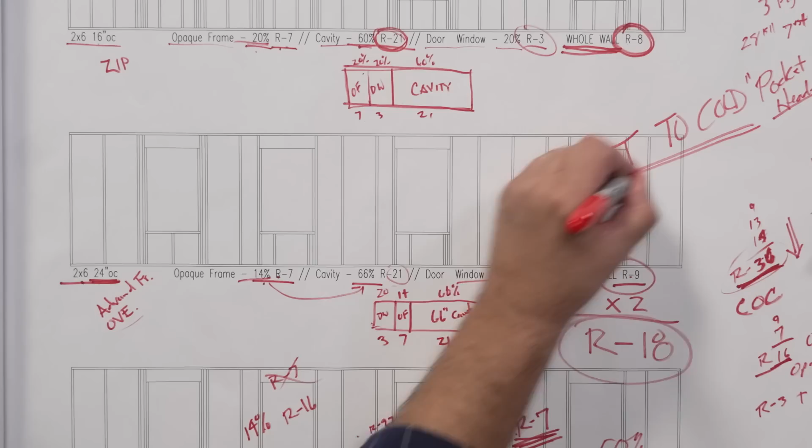What's interesting is I hear a lot of people say, oh, I'm trying to keep the cold out, so I'm going to insulate my house. Or people in Texas or Florida say, oh, I'm trying to keep the cold in down here. No, you're not. You're never battling cold, ever. Cold doesn't move. Heat moves, and it moves from hot to cold.

So in a northern climate like we are here, climate zone 5, you can go online and Google climate zone map, you'll see the 8 zones across the United States. You can see where you fall into that. In the heating climates, it's easy to say hot to cold because we're providing heat on the inside and it's trying to go outside of my wall system.

So yeah, I put up insulation. It's like putting a jacket on when I go out in February in Boston. I want to stay warm. I put insulation on and it keeps the heat generated in my body from being released to the outside and warming up everything that's cold around me, so it insulates me. Now in Texas...

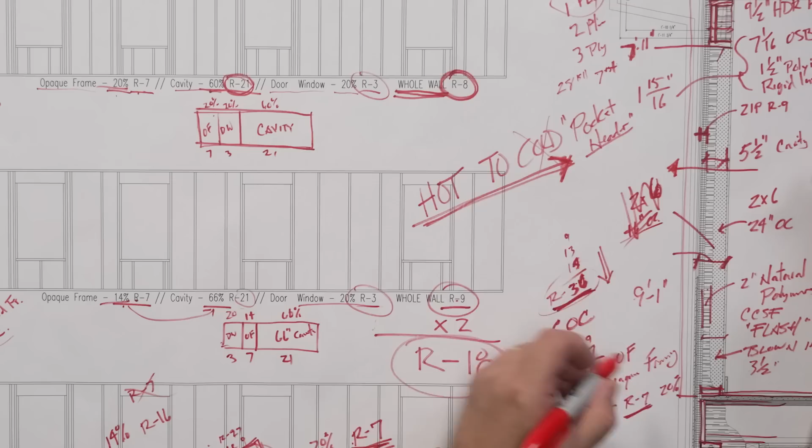Let's just say it's 90 degrees outside and I'm trying to keep it simply 70 degrees inside. Well, I have a 20-degree delta. Guess what? Heat is still trying to get across that wall. And the only way to stop heat from moving across the wall is to provide resistance. And what is resistance? R value, right?

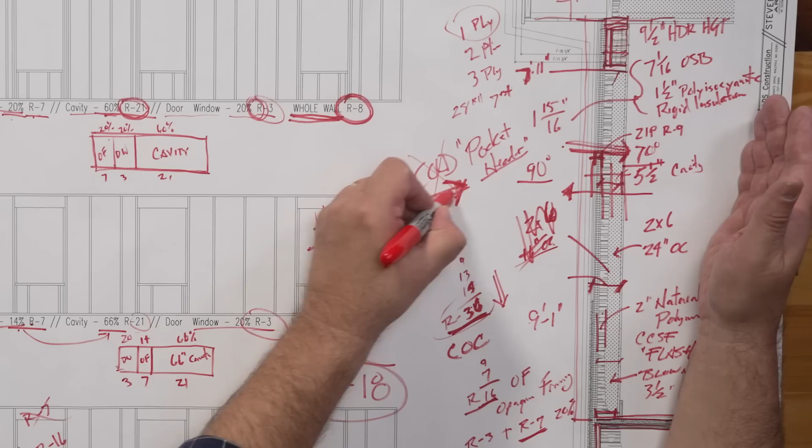That's where that little R comes in, it's the thermal resistance value, the R value. So when it's 90 outside and 70 inside, that heat is trying to migrate in. How do I battle it? By putting a series of insulation across that wall to slow that heat transfer, because heat moves from hot to cold. Stop saying the cold moves, it doesn't. It's hot to cold. And that's wall framing.

Next up, roof framing. That's where we cap it off. See what I did there?